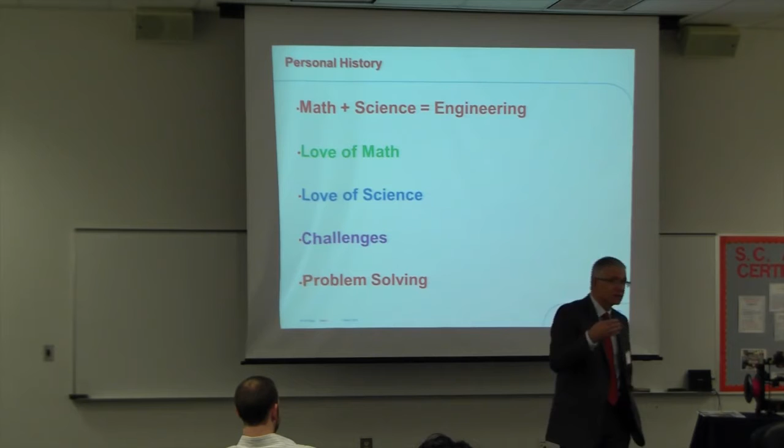My love of math, though, actually went all the way back to second grade when I really looked at it. And I tell you that because my teacher at that time, that was Mrs. Gibson. She taught us that we had games. I don't know if you're allowed to do that anymore.

I liked it because I like winners and losers. I'm sorry, I'm not politically correct. And we used to have it where you'd line up at the back of the classroom, and then you'd run up to the chalkboard when we still had chalk, and she'd give you the thing and say, 7 plus 4, who can get it first?

And I always wanted to win. I just love winning and doing that. That was one of those things that inspired me. It wasn't that the other kids were losers. Everybody won because you learned from that. And I really appreciated that. I appreciated the encouragement my teachers gave, that they were the ones who were trying to pick everybody up and helping us to make sure to learn and to do better.

Science was great. I loved science. I liked all the different sciences we got to go through, and I was challenged by that. It's okay to challenge people. I really believe that. My challenge for me was physics.

I got an opportunity to take physics in the 11th grade. In our system at that time, you had, I forget how they call it, semesters, but you had 3 quarters. But we had 4 different physics classes. So one semester, I was going to be cool. I doubled up. I took 2 physics classes, man. I thought I was something by doing that.

But you know what it was? It's about taking a challenge and challenging students. I really believe that. I believe it's important to challenge people in life. One of the things I found is with the engineers I have a number of engineers that work for me, and I challenge them. I want them to grow as individuals and to continue to learn. We learn all through life.

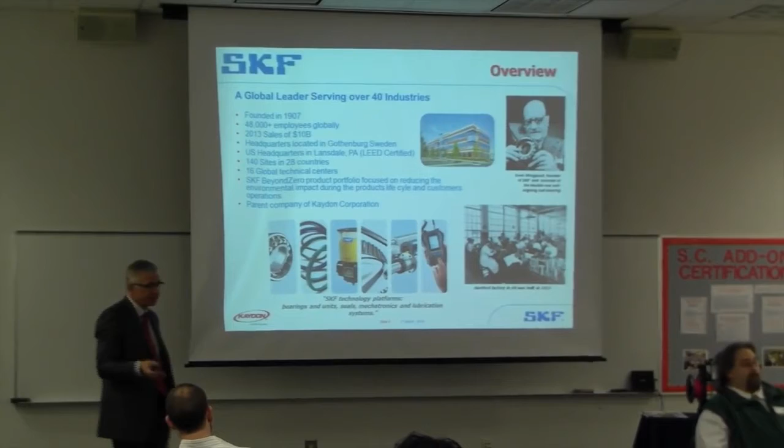Kaydon - you're going to see this combination, you're going to wonder why SKF and Kaydon. SKF a couple years ago purchased Kaydon. Kaydon was a smaller company that came out of Michigan, and I'll talk a little bit about it. But SKF is a large Swedish company. SKF stands for something, and I'm not even going to try to pronounce it because it's Swedish, and it's got all kinds of things that I wouldn't get right and would sound very bad. But it's a great company.

It was founded in 1907, has 48,000 employees. This tells you a little bit about the sales. It's headquartered in Gothenburg, Sweden. U.S. headquarters in Lansdale, Pennsylvania. There's 140 sites in 28 countries, 16 global technical centers.

Technical centers are important in business. It's important that the engineers and the scientists continue to work to develop new and better. Our parent company of Kaydon Corporation - this shows a few of the applications of the bearings, and up in the right-hand corner, Sven Wingquist, the founder of SKF.

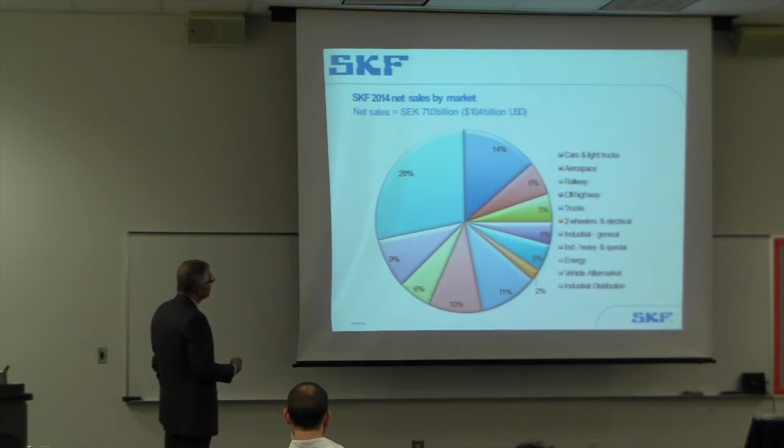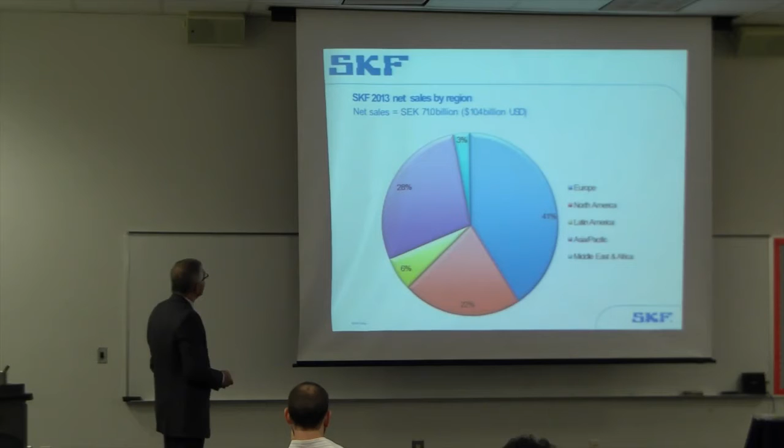Inventor of the double-row self-aligning ball bearing. This tells you a little bit about net sales if you wanted to look at that kind of stuff, getting into where the market is. The point of this chart is to show how many different industrial areas that these bearings for SKF go into - not only cars and light trucks, but aerospace, railway, off-highway trucks, two-wheelers, industrial and heavy equipment, energy, vehicle aftermarket, industrial distribution. This is a little bit about the sales by region. The point of this is SKF is a global company.

Talk a little bit about Kaydon. Kaydon is the smaller part of SKF. SKF is the large - we consider ourselves, we make the niche of the niche bearings. We make bearings other people don't make. We make them, and they are very specific applications, and they go a little bit differently than some of SKF's areas. This talks about how we're committed to identify, engineer, and deliver world-class friction control and motion velocity control solutions to solve our customers' design challenges and needs.

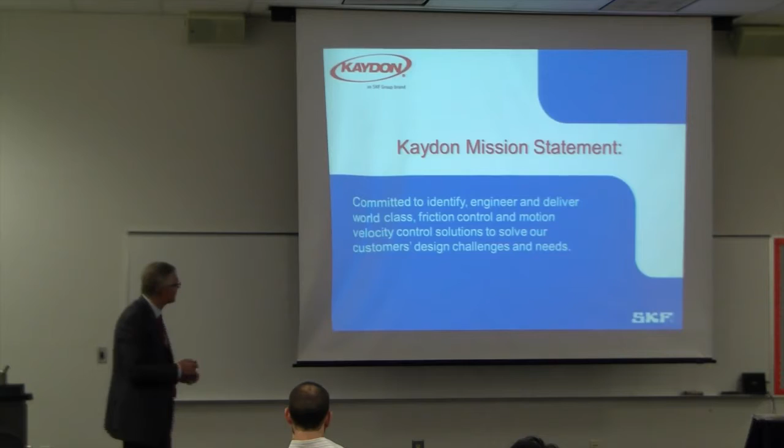A little bit of history about Kaydon. Kaydon was established in 1941 by Harold Frauenthal. Strategic growth - the interesting thing about Frauenthal is he not only developed the company, we actually have some of the equipment, the grinders, he invented and developed himself in one of our plants down here. It's an interesting thing that the man not only came up with the idea for the bearings, but he also came up with the way to make them. So that was a cool thing.

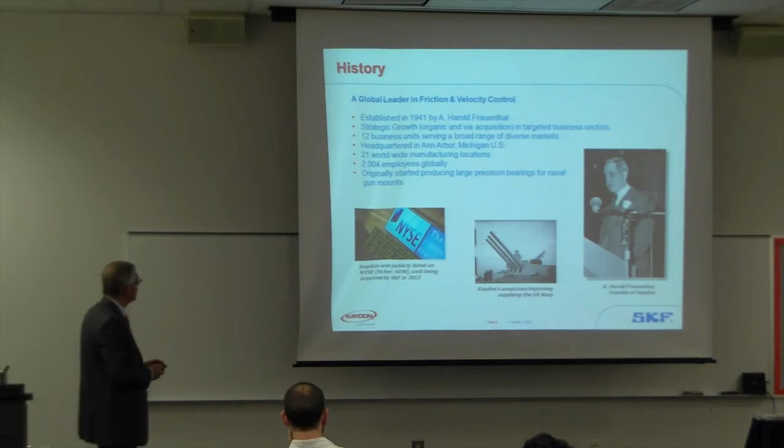Talks about strategic growth and targeted business sectors - 12 business units serving a broad range of diverse markets. It's headquartered in Ann Arbor, Michigan. 21 worldwide manufacturing locations, 2,000 employees. Started producing large precision bearings for naval gun mounts is how it started - Kaydon.

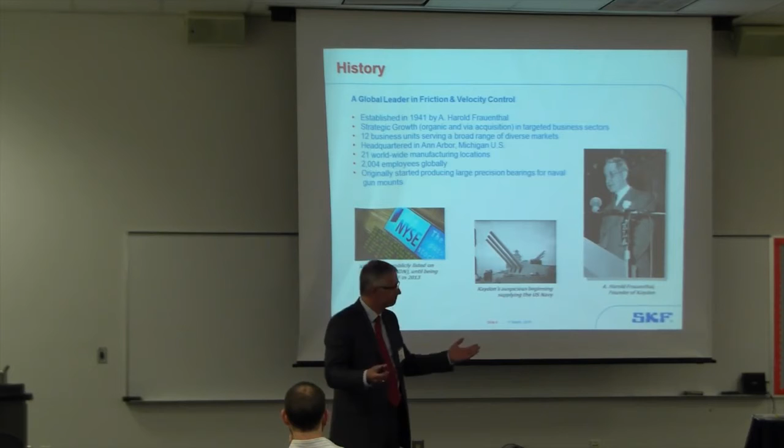You're going to love this. The name Kaydon. Harold Frauenthal had 2 kids, Kay and Don. I thought that was cool.

Providing customers with problem-solving, application-specific, custom and standard thin section and slewing ring bearings. Slewing rings are very, very large bearings that we make.

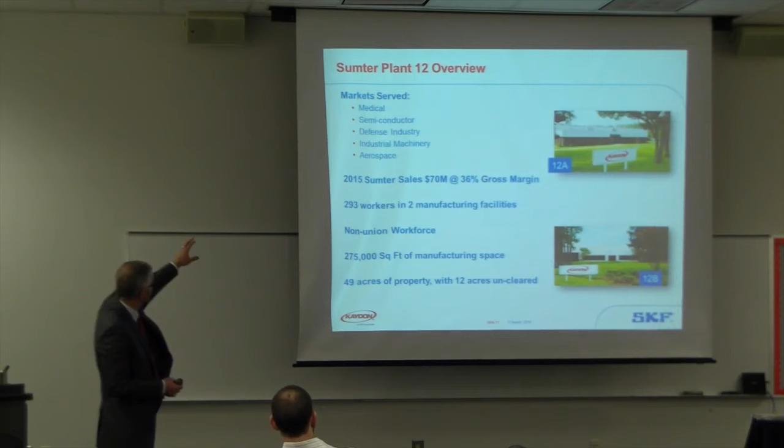This talks a little more about the different locations shown here. We actually have 2 plants down in Sumter, just a stone's throw from each other. We make bearings in Sumter that serve different markets: medical, semiconductor, defense, industrial machinery, and aerospace.

I brought some toys if you'd like to pass them around and take a look, because they're unique. A couple of them you're not going to pass around because they're pretty big. These larger bearings - some of these, if you really look at them, we're going to talk about the math in some of these things. They're neat, it's just amazing.

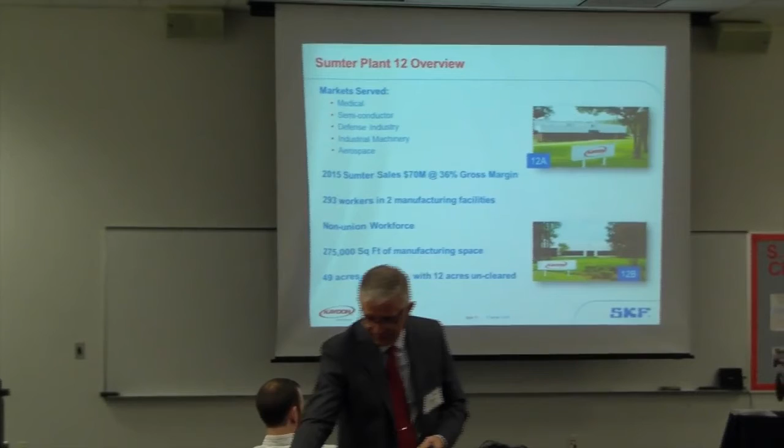When I started working there, I've been there now about 4 years, I thought maybe I was going to find some bearings I could use in my John Deere lawnmower. But they don't make that kind of bearing. That's actually a bearing. This is a bearing. That's an amazing little bearing. How we make it, I don't know - I'm supposed to run the place.

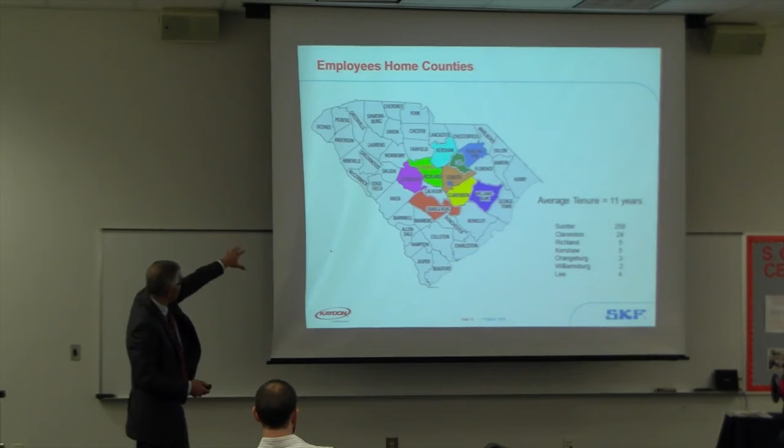This is about where we're at in South Carolina as far as the people, and where a lot of the people come from that work at our plants, just to give you an idea of that.

We're considered a world leader in thin section bearings, the North American leader in slewing ring bearings, specializing in thin section bearing slewing rings. Experts in solving demanding bearing design requirements. Thin bearings save space and weight. Slewing ring bearings for optimal economy in a given envelope dimension.

Some of those bearings you have there - there's one that doesn't even look like a bearing, it's got a little arm sticking out of it. That goes in a semiconductor robot used to make silicon wafers. It's cool stuff. Some of the ones over here, I think one is for a blood analyzer unit. In the medical industry, we make bearings for blood analyzers.

We make them for CAT scan machines. We also, when we go to CAT scan machines, go into luggage scanners used in airports. It's kind of an amazing thing. We make bearings used from an application standpoint for military.

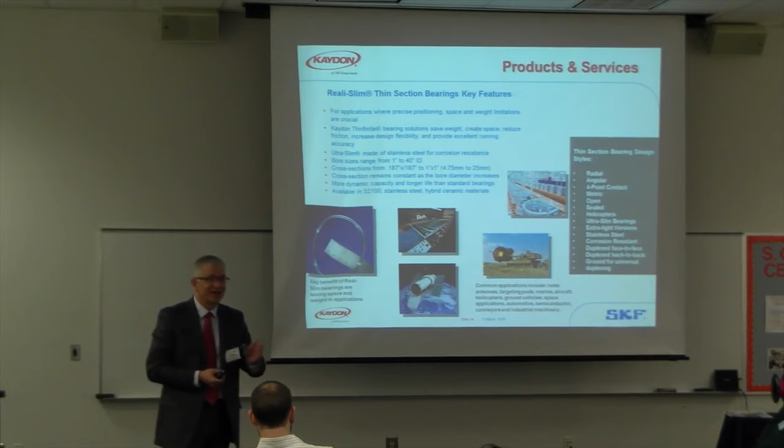Let me get a little further into some of the things we do. Military applications - the large bearings are used on gun turrets. We make bearings that are over 20 foot in diameter. At one of our plants, we make them as small as 3/4 of an inch in ID for some applications as well. We make those used on helicopters.

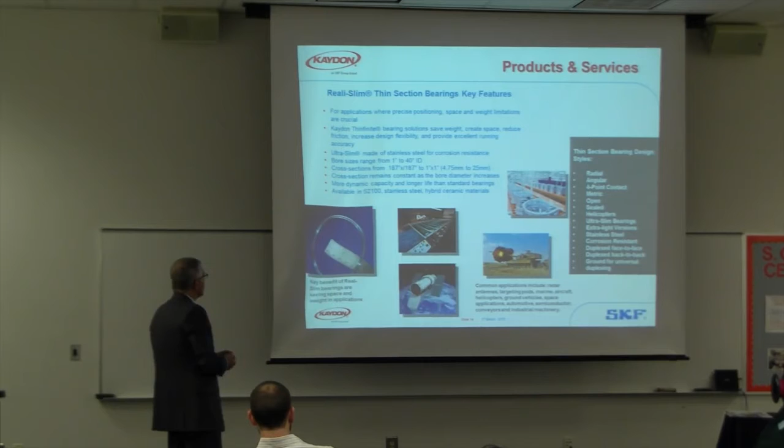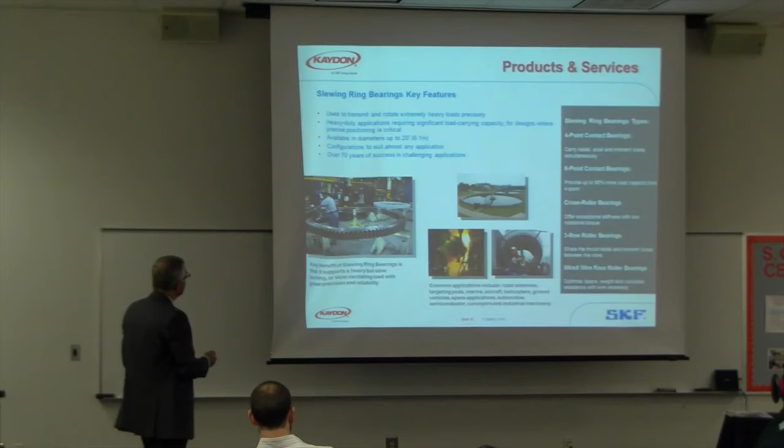They're used in applications such as, let me see here - there's one of the large ones for you. Some are used in aerospace, in planes themselves. That one's used in the steel mill. Amusement park rides, airline passenger bridges, satellites and radars. These are some of the ones, and more of them in Sumter, used in different positioning devices.

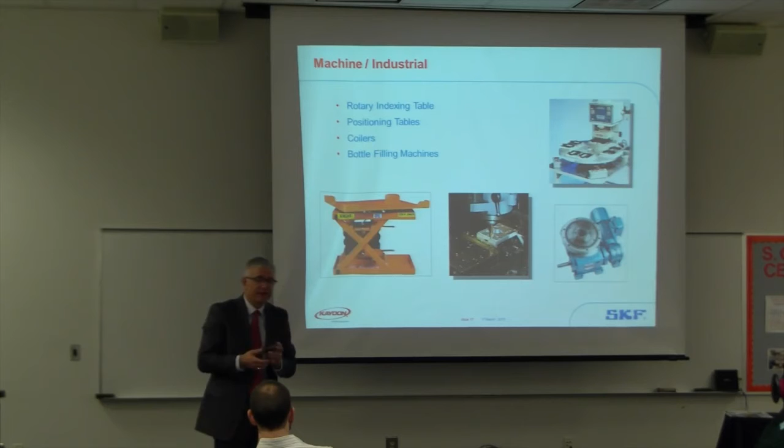Some of our bearings aren't used in a rotational aspect. I always thought of a bearing as just always rotating. Some of them only oscillate and move back and forth in such a way that's used for extreme precision associated with things like telescopes and microscopes.

This system is used as an anti-missile system on planes. So if a missile is fired, it's used to detect that missile, and it has to rotate in a heartbeat and move so it can shoot a beam out and deflect it away so the plane doesn't get hit. Cool stuff, cool stuff.

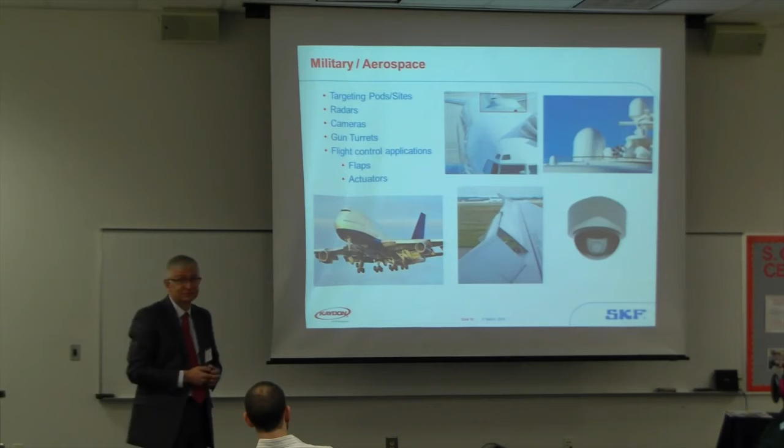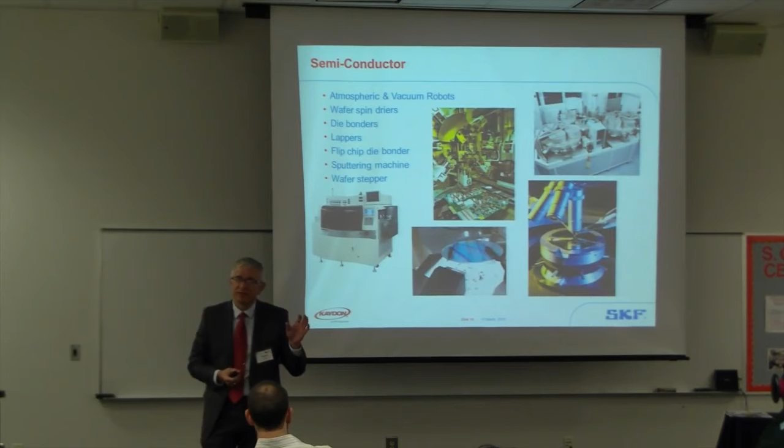This again is some of the analyzers that the larger bearings go into, and the tanks that they go into from a turret standpoint, protecting people. A lot of neat applications, but we'll talk about the math and science in bearings. There's a lot of stuff that goes into these bearings that you have to get in from an analysis standpoint

and look at, design-wise. The first bearing goes back—actually, pre-Da Vinci had come up with an aspect of a roller bearing, a ball bearing like that. The idea probably predates that, the idea of just rolling mechanisms and how to help move things along is a bearing. So that gives you an idea of a basic ball bearing.

There are other kinds of bearings, aren't there? There are roller bearings that have rollers. We don't make those here in Sumter, we only make ball bearings. The ball bearings we make go down to 1/8 of an inch ball size. The interesting thing is the majority, in fact in our plants, all of these bearings are put together by hand. It's not automated, because our volume, for one thing, is not that high, and because the accuracy has to be there that well. That's tight.

The balls themselves, the roundness of them—many of those are what are called Class 6 parts. Class 6 parts, Class 7 ABEC, require that the roundness be within 2/10,000ths of an inch, 0.0002. The ball size increments that we vary are in 1/10,000th of an inch. When we receive those, the tolerance on those balls we get from the supplier are in the 50 millionths range. It's amazing stuff, and the measurement of that gets very hairy, as you can imagine, trying to make sure we're getting that right.

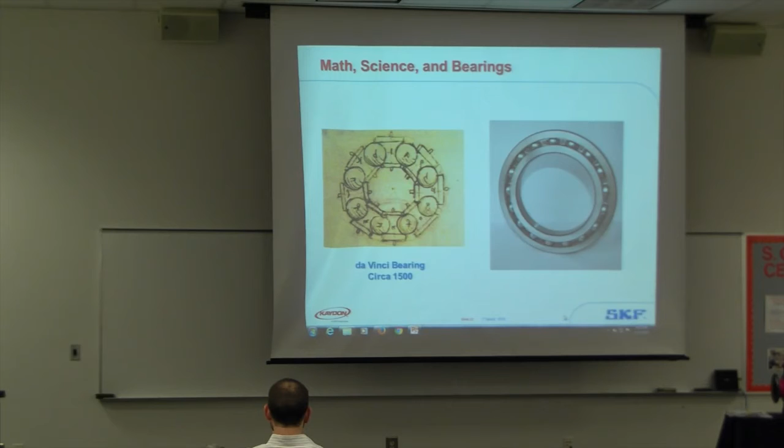This gets into a little bit of an aspect, it's in one of our catalogs, associated with the application of a bearing onto a shaft—whether you're looking at the thrust forces, the radial forces, the axis of rotation, the moment, coming up with the moment load associated with it, so you can determine what kind of bearing you need.

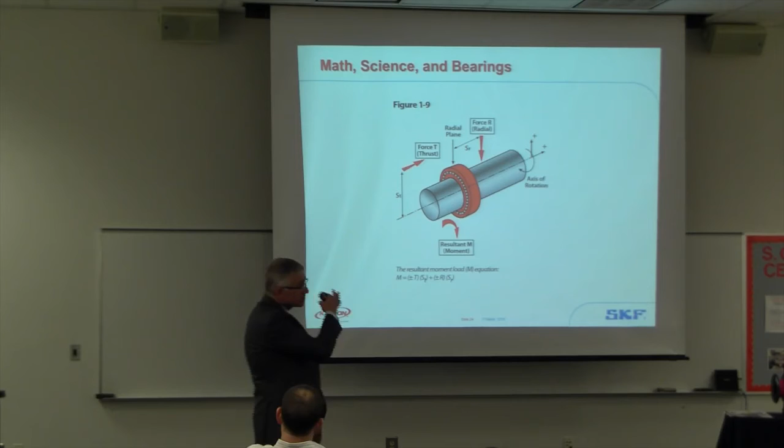We have engineers, product engineers, who work out in Muskegon, Michigan, who are responsible for talking directly with customers about their applications. The application may vary in size, but it can also vary in things like what kind of lubrication do you want—some are very exotic types of lubrication that go in bearings. Do you want the bearing to be preloaded or to have clearance?

Some of the parts actually have the bearings themselves—the races, the inner race, the outer race, and the ball. The ball is less than the difference between the inner and outer, so there is clearance in it. It's meant to be that way for that application. Others, the ball is greater than that space, so it's tight—because certain applications cannot have any extra movement in it at all. It's going to have a little bit more torque to it, it's going to be tight, but that's the way that's been prescribed, that they want that.

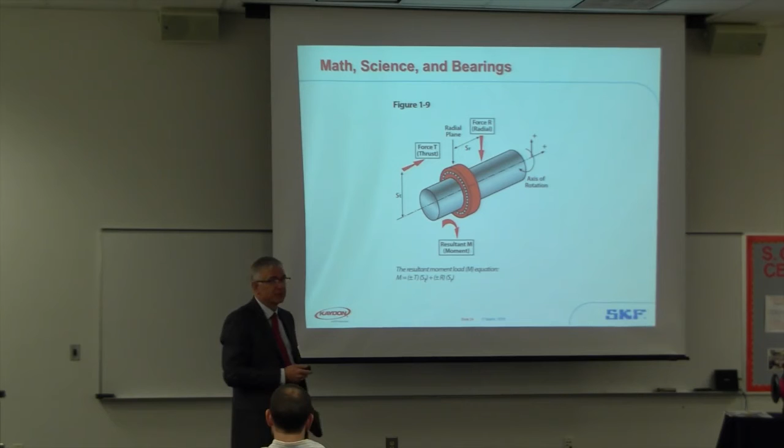There's also, over here at the far right, an angular contact bearing. Depending on the application you have, gives you the requirement for what you want. In a case like this, a C-type bearing, if you look at it from a loading standpoint, is going to be one that has a lot of radial loading to it. The bearing itself is part of one of the bearings. Your loading is going to be a lot more straight on like this, so it can handle that loading better.

The load it's not going to take very well is if I have a thrust load against it—it's going to want to try to come apart. An angular bearing is made specifically for that kind of thrust application, so that when you push one way, you're always staying in contact and it's not going to come apart. Now, if you push the wrong way, it will definitely come apart. There's a snap land to it that tries to hold it together, but it does have that ability.

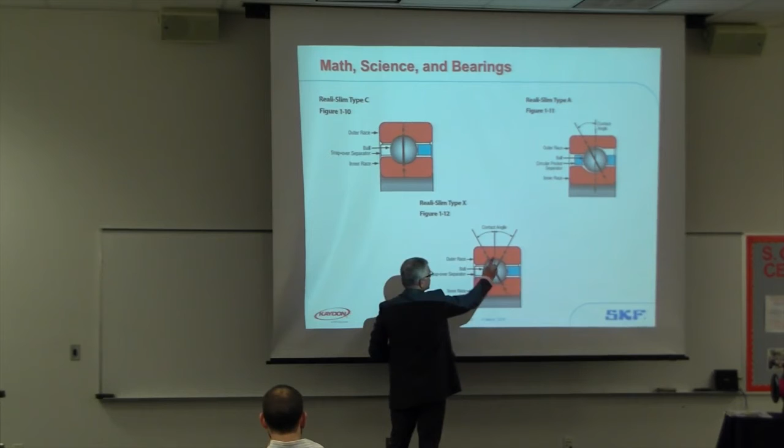And then there's this wonderful thing—this is called an X-type bearing. An X-type bearing, the ball actually doesn't sit in the bottom of the pocket. It sits on two points, and this is called part of the Gothic arch that was created.

That's made by way of what we call our methodology for making bearings, through grinding. What happens is we have these very precise things called diamond rolls, also called a crush roll dresser. They're made with diamonds embedded in them, and they are very expensive. You take and dress the grinding wheel, bring it up against the grinding wheel, and the form takes shape right into it.

You use that grinding wheel then to grind this, and this is hardened steel. We make it out of two different kinds of steels, 52100 steel and 440 stainless steel. Stainless, of course, because it won't rust. 52100 will have a preservative or some type of coating put on it to protect it. So these are the different kinds of things.

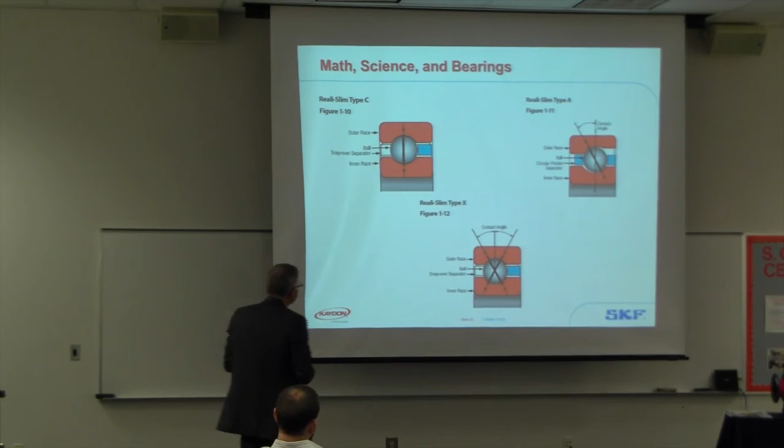All of these get into some very neat mathematical relationships. You can see up there it talks about contact angle. Contact angle is very important to the amount of load it can be placed into. This actually has two contact angles, and those have to be matched to some degree between the inner race and outer race for the part to run correctly. If those contact angles are significantly different from each other, the ball won't rotate correctly on it, and it will give problems.

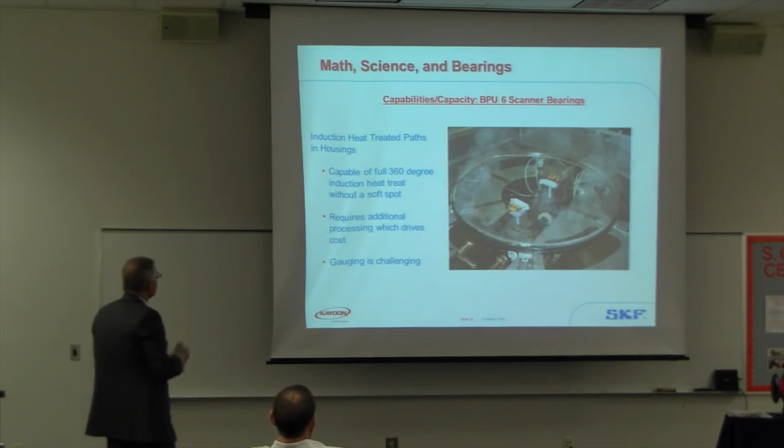Some other things, this is a picture I wanted to show you. This is an induction hardener, and that is a 6-foot bearing, if you can picture that.

In induction, there's two different ways of hardening steel. You may know this, but I wanted to share. Through hardening is you take a piece and put it in a furnace, and we have furnaces that get up to over 1,500, 1,600 degrees. You put it in for a specified time, bring it out, and quench it, dropping it into oil. By doing that, we take the hardness of this from about a 40 Rockwell C up to almost 60.

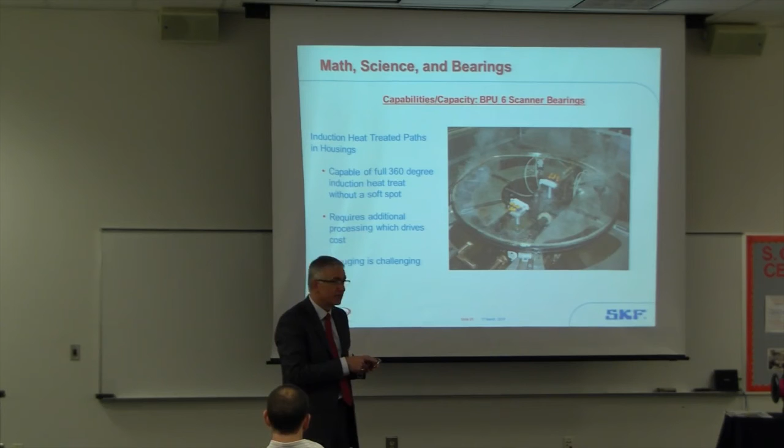It becomes very hard. Another way of hardening is called induction hardening. What this does is, rather than the entire bearing getting heat treated, only the inner part where the path where the balls are going to rotate is heat treated. It becomes harder. The outer part of that bearing stays soft, but the inner part then allows the balls not to wear against that part.

This is some neat stuff because this is electrical. It induces that heat through it and hardens it that way. Our induction hardener of this type was induction hardener 0001, the very first one that was made of this type for our application.

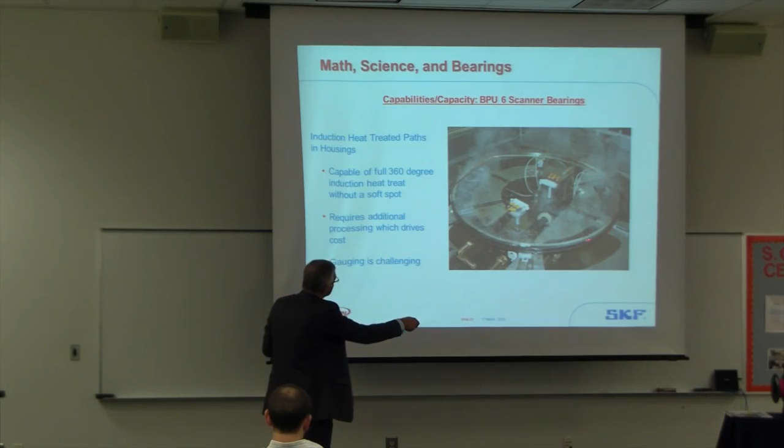The neat thing about it is, as you can picture this coming around, one of the problems would be that where it meets, you could potentially have a soft spot, because this thing is mechanically moving around to do it. But the way that this has been made, they were able to do it in such a way that it has no soft spot. It's very neat stuff.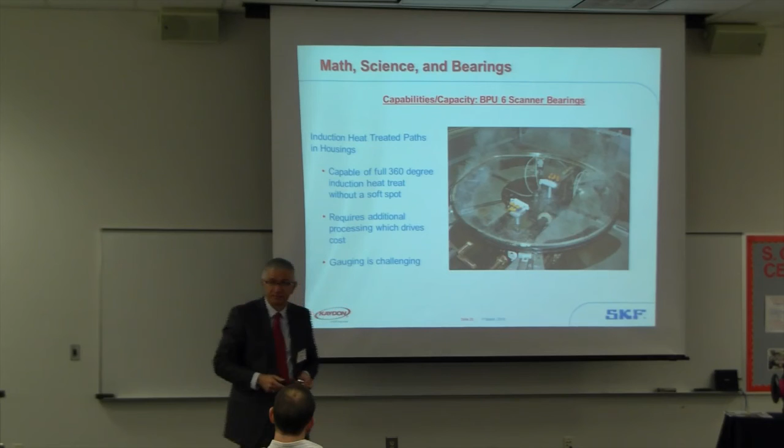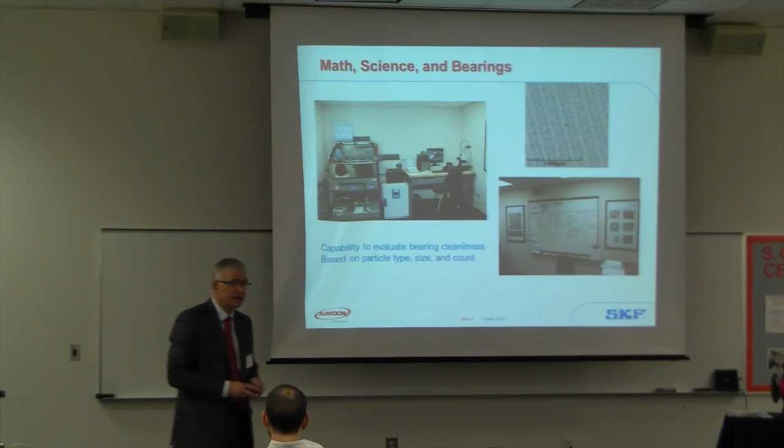Help me define, how smooth do you need it? How clean do you need it? Well, the neat thing about this system is there's actually two pieces to it. This piece here is used, and what happens is this glass lid is lifted up. There are two rubber glove areas right here. You stick your hands through, and you take it and you wash out the bearing completely. Down below it, it all filters down into a little filter right there about an inch to 2 inches in diameter, and you have to define how many times you rinse through it.

You capture that, you take that filter then, and you come over here, and this is a scanning microscope that can actually go in, and it can tell you what kind of particulates you have, whether you have metallic particulates, whether you have non-metallic, and how small they are down to less than 5 micron. Amazing stuff. And it's something that we're just getting into to advance our work because our customers are expecting that.

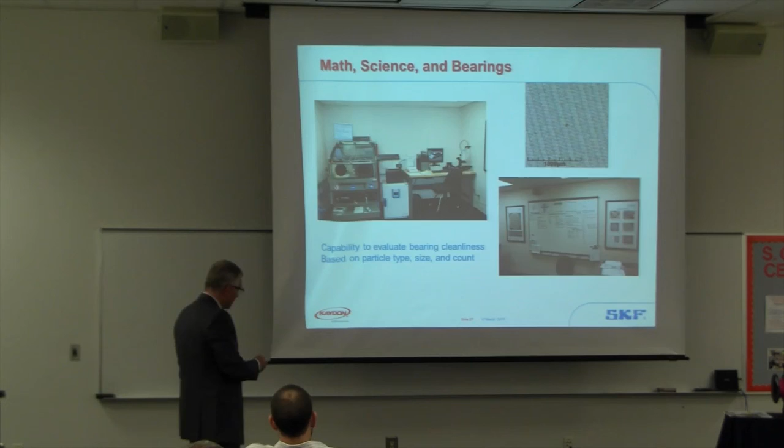Because one of the things we do is we have a clean room. Our clean room, we work in there for some of these bearings, not all of our bearings, but for some of the applications like semiconductor, like the positioning devices that were used for high-aspect military applications. You have to go in there, you have to completely put on a whole white suit, the gloves, the mask, the hairnet, the whole thing. Because they say even a small piece of dander, of eyelash dander, can cause a semicon robot to hiccup in its movement, and if it does that, it destroys the silicon wafer. Neat stuff, neat stuff in how we do that.

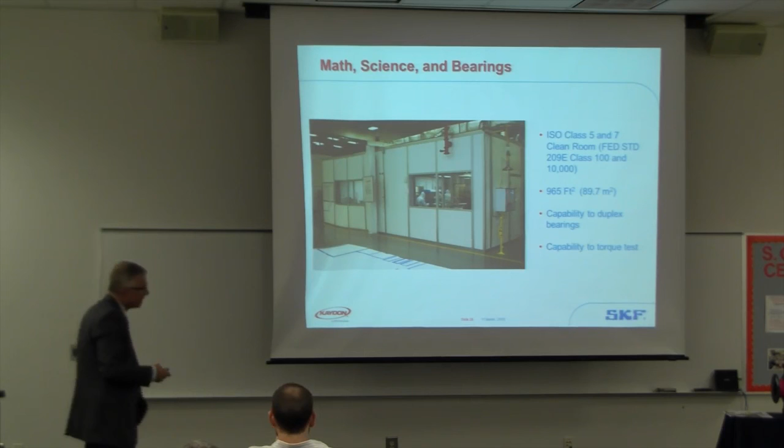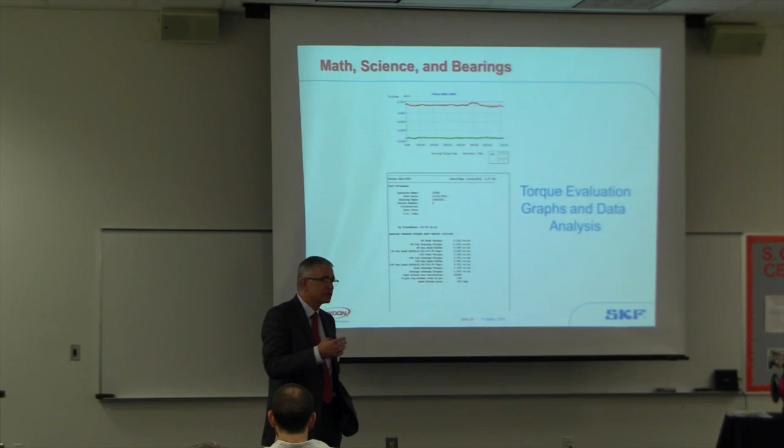Inside there, we have capability that we can do torque testing, and we have some elaborate torque testing equipment. I think I showed that up here. The evaluation we do from torque is not just the amount of torque, but we look at the min-max torque of it. We look at that graph up at the top, and the two graphs represent rotating it clockwise, rotating it counterclockwise, to see if we have any difference. We have the ability to look at that graph and to tell you if there's any problems with the bearing, if there's problems associated with contamination, if there's any issues associated with the way that it was made. One of the things is called chatter, if it's ground incorrectly. Making sure that it's done the best possible way.

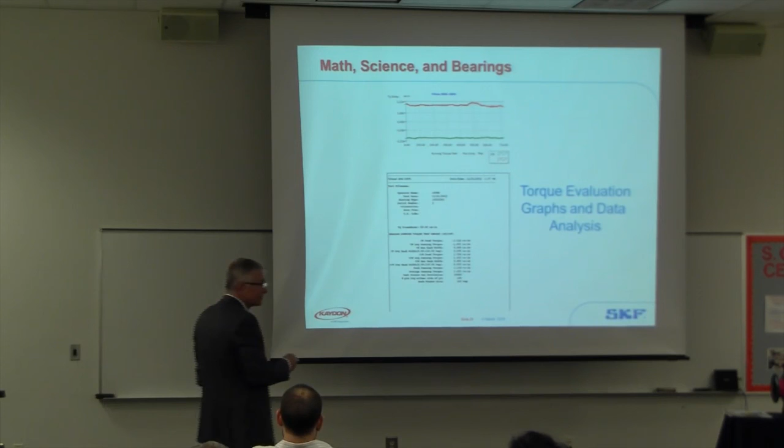Do you see mathematical and scientific applications in all this? Because boy, I sure do. I sure do, and we've lived through it, and I like this. I like what we do. One of the things, too, I want to let you know about our application is we can say that our bearings actually are out of this world. The Mars rover has a Kaydon bearing. So that's kind of a cool thing to look back on and see that.

My friends, one of the things I want to convey to you is I appreciate the opportunity to come here tonight to tell you thank you for the job you do, for the importance of what you do, and for passing on to the next generation what it means to have, I'm a nerd, I like being a nerd. I don't know about you all. I like the fact of math and science and engineering and technology. Those things have served me well in my lifetime. It's served my family well. It's provided food on our table in a very nice house that we have.

It's because of you all, because of what you've done. Not every student is going to get the opportunity to be an engineer, nor do they want to be. But it's important that every student knows that you care. That's the greatest thing any teacher can do, is just care. Any human being - that's what at times I'm afraid we're lacking right now in our world, is not enough caring people. We just need to care a little bit more. We need to help, because there's a lot of jobs. Within our plant, Kaydon, not everybody's an engineer. There are people who are machine operators. They're very smart people because of what they learned in school. Continue to help the people. We've got to make sure we're doing that. Okay, I'll turn that over to...